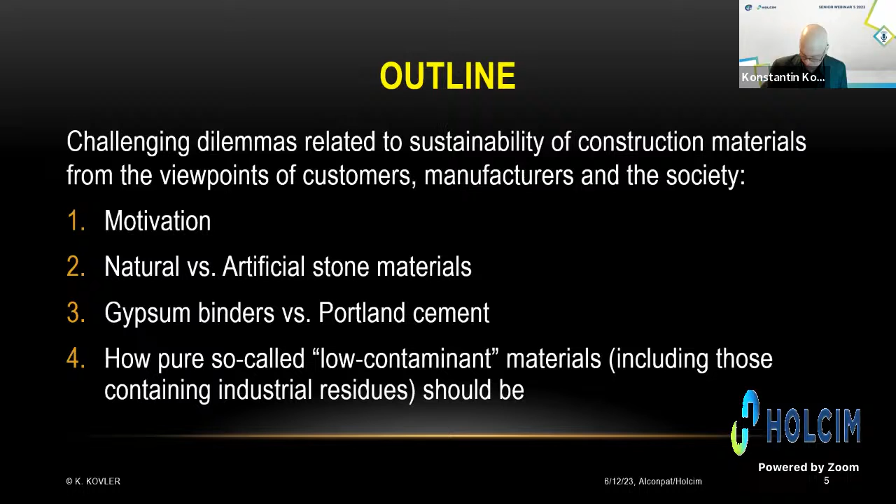So, motivation. As we know, construction not only consumes about 40% of materials produced in the world and about 1/3 of the energy, but also pollutes the environment. Extraction of construction materials, including sand, gravel, clay, limestone, and natural stone, causes noise, vibrations, and air pollution. So how can we manage all these unpleasant influences on the environment? And of course, we cannot forget about the transformation of land into built-up area.

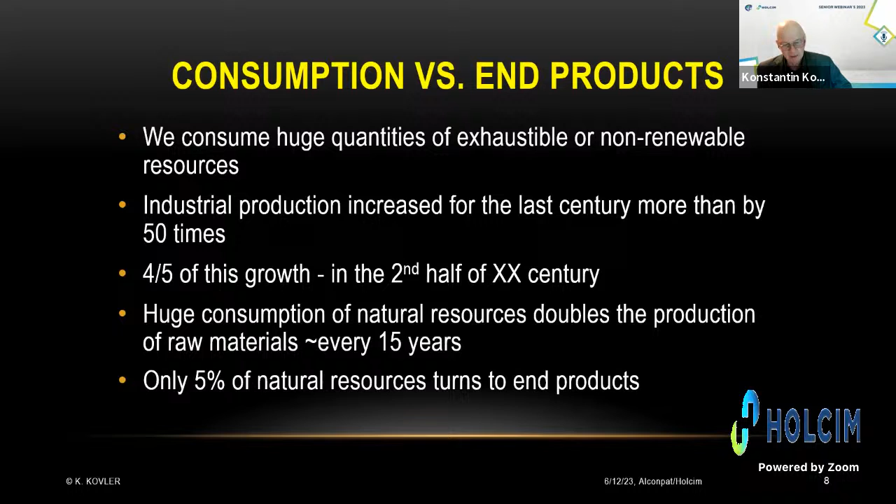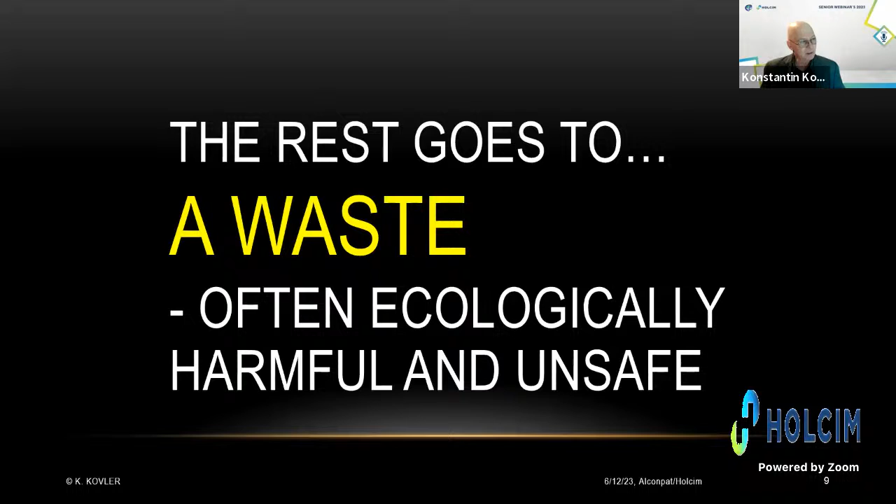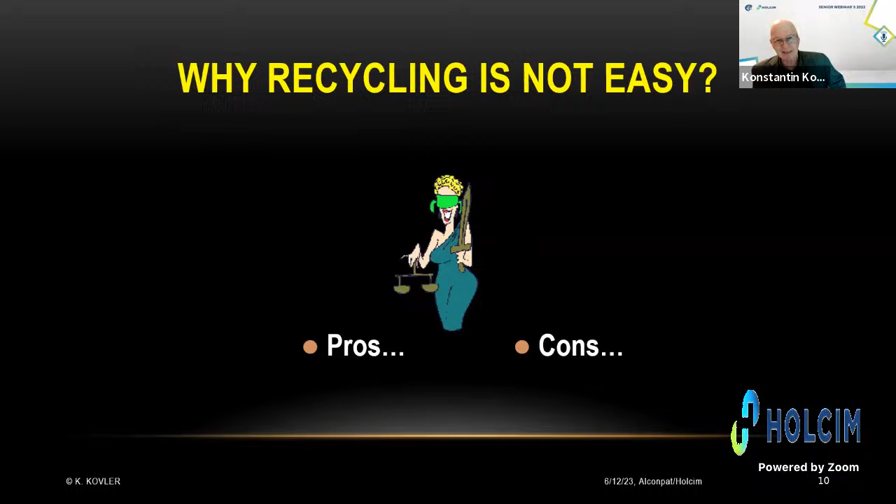So, unfortunately, we consume huge quantities of exhaustible resources, and industrial production has increased dramatically over the last century, by more than 50 times, and 80% of this growth happened in the second half of the 20th century. Huge consumption of natural resources doubles the production of raw materials every 15 years. And very unfortunately, only 5% of natural resources turns into end products. The rest simply goes to waste, often ecologically harmful and unsafe. So this is a very challenging topic, not only for our generation, but for our kids and grandkids, for the next generations. And then I would like to discuss shortly why recycling is not so easy. Let's consider the pros and cons of recycling.

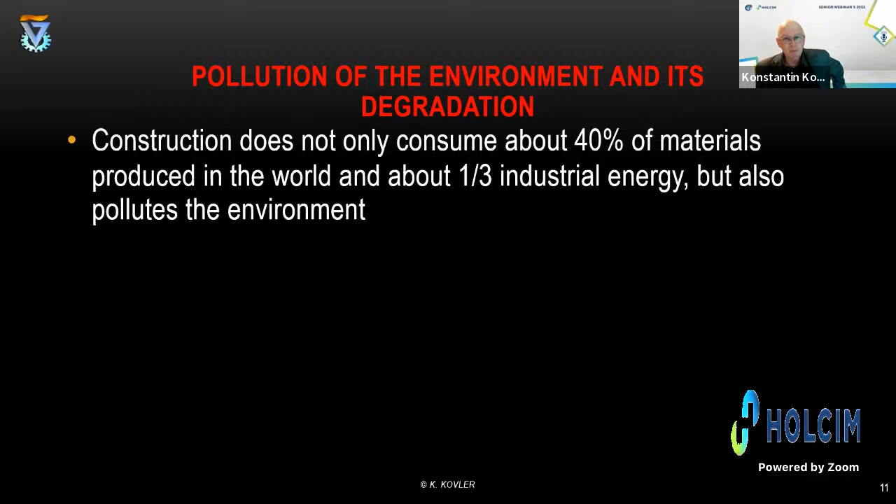Again, I spoke about pollution, transformation of the land. What would be the solution? Like Professor Mehta mentioned more than 10 years ago, let's consume less concrete, because concrete is still the most popular building material. It's consumed in large quantities. After water, this is the second consumable in the world.

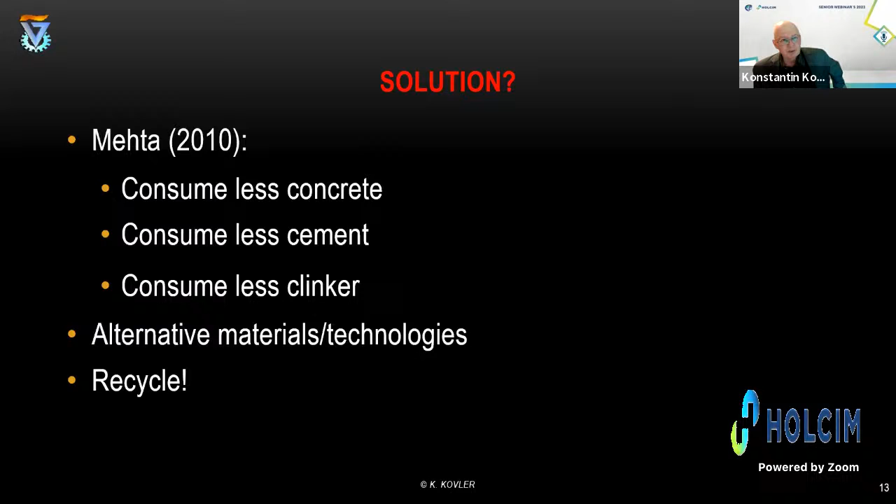Let's consume less cement, and let's consume less clinker, and let's discuss and develop alternative materials and technologies. And of course, let's recycle. This is what Professor Mehta said. But the question is why it's not so easy. And the first dilemma I would like to start to discuss: natural versus artificial stone.

Natural stone is used in the construction industry mainly as fractionated materials, as aggregates for concrete, both dense and porous aggregates, as mineral fillers. It's used for geopolymers, but again, it's fractionated material. It's powder or granular material. It's used as mineral pigments. It's used for thermal insulation, abrasive materials.

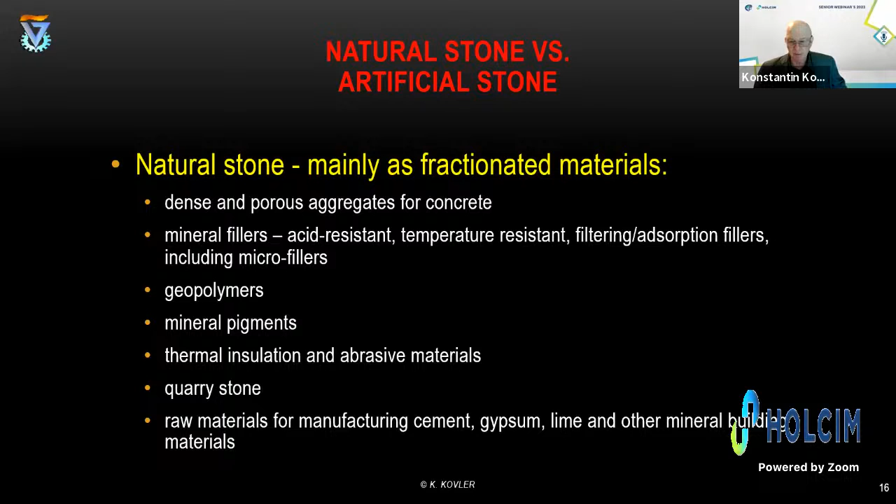So we are speaking mainly about quarry stone. And we are speaking about raw materials for manufacturing different kinds of building materials like cement, gypsum, lime, and other mineral building materials. Let's speak about natural artificial materials. This is another group, which is a kind of intermediate or overlapped materials,

organosilicates, basalt fibers, foamed and liquid glass, basaltoplastics, expanded products like perlite, different kinds of adsorbents, mineral binders, and of course concrete, ordinary concrete, aerated concrete products, gas silicate and pressed powder products, etc., ceramics and fireproof products, and so on.

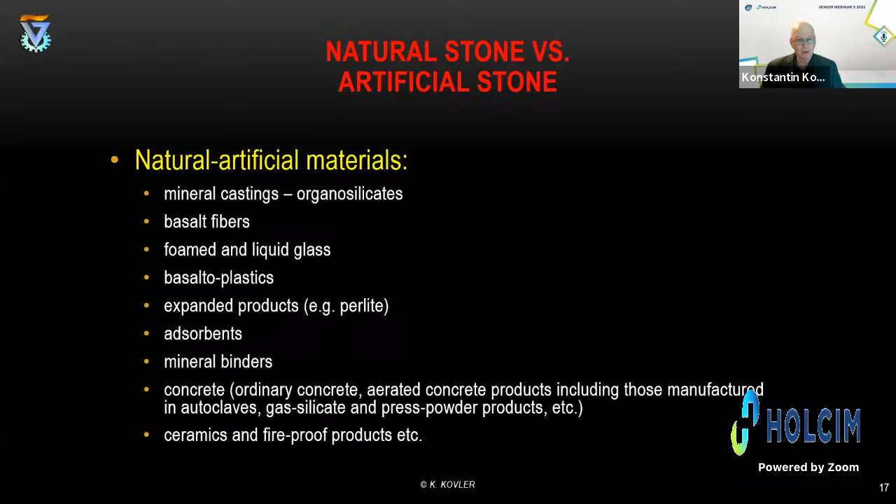And finally, I come to natural stone products, which are sometimes called dimension stone. You can see many different examples of dimension stone products. They're used for finished products. Let's say artificial stone tiles, paving stones, prefabricated panels, architectural details,

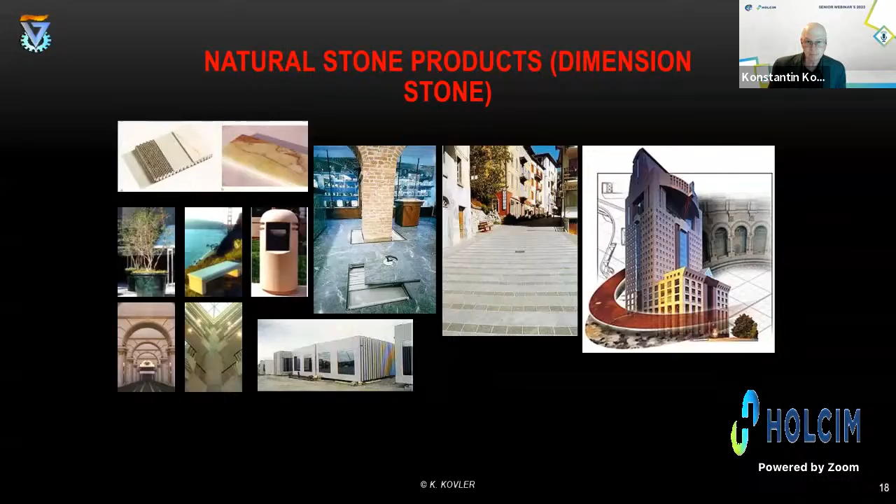interesting things to produce like benches and other interesting and important architectural details, vazons, interior details, sandwich panels, and many, many other things. So, natural stone, like artificial stone, starts with rock extraction. And then I would like to discuss coercive or destructive versus non-coercive or non-destructive methods of extraction.

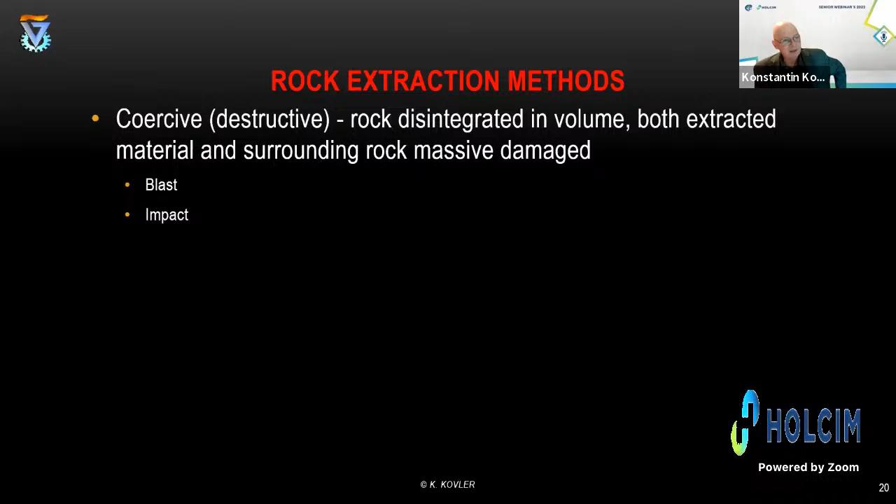Rock extraction methods. So first of all, destructive, which are the dominating methods of rock extraction, where rock is disintegrated in volume. And unfortunately, both the extracted material and the surrounding rock massive are damaged. Sometimes people say it's a barbaric technology. It's blasting and impact. So it's really coercive, destructive technologies which influence the environment a lot.

Then we have so-called partly coercive or partly destructive, where rock is disintegrated in a certain volume, but the surrounding rock massive is undamaged. As an example, we can mention TBM, or tunnel boring machines, where the extracted material is fractionated material, aggregates, but the massive surrounding the tunnel is left undamaged. And non-coercive or non-destructive, where both the extracted rock and surrounding rock massive are undamaged.

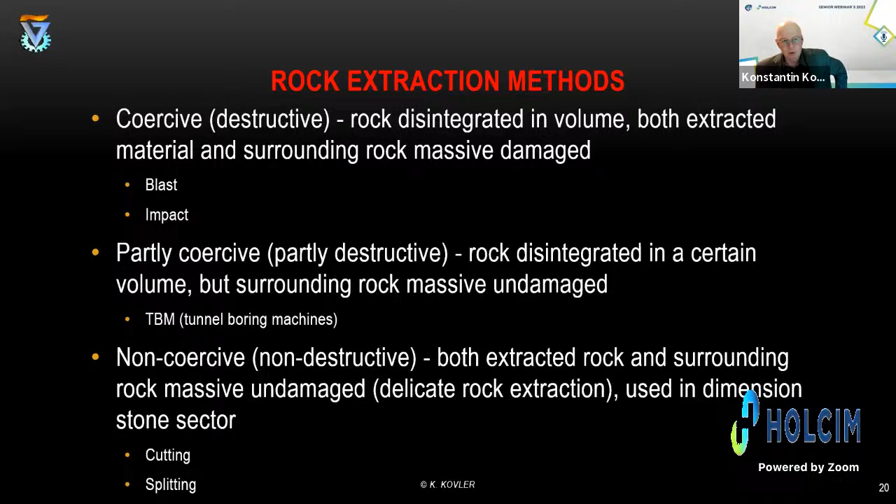So we can call it delicate rock extraction, which is used in the dimension stone sector. Most of the technologies for dimension stone production are based on cutting and splitting stone. Let's start discussing drill and blast. I know that in Mexico and many other countries, also in Israel, the United States, China, India, drill and blast is the dominating technology for extraction of rock. So I don't want to go into detail.

First of all, we need to drill, insert the explosive, and then blast. We need to strengthen the roof, which is extremely important because the surrounding massive is damaged. And we need to invest money, and it's a time-consuming technology to strengthen the envelope by shotcreting or by inserting precast elements made of reinforced concrete. So it's not easy, but we have to do it. Depends on the rock, of course.

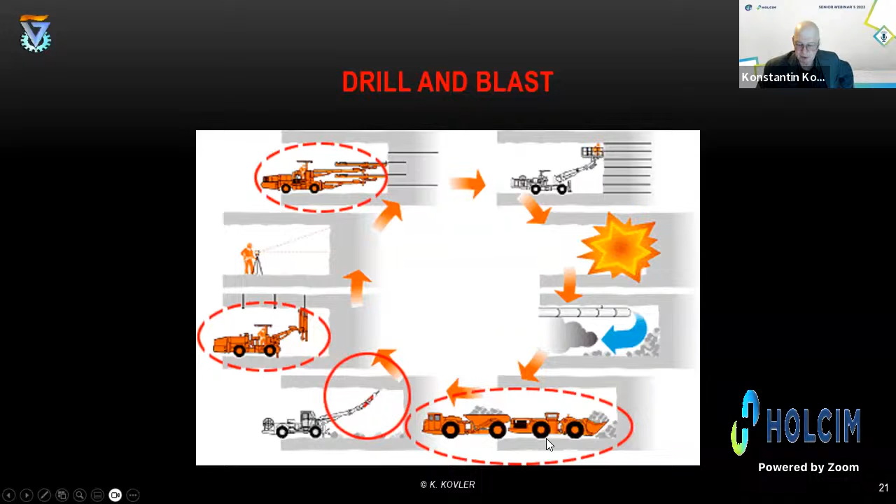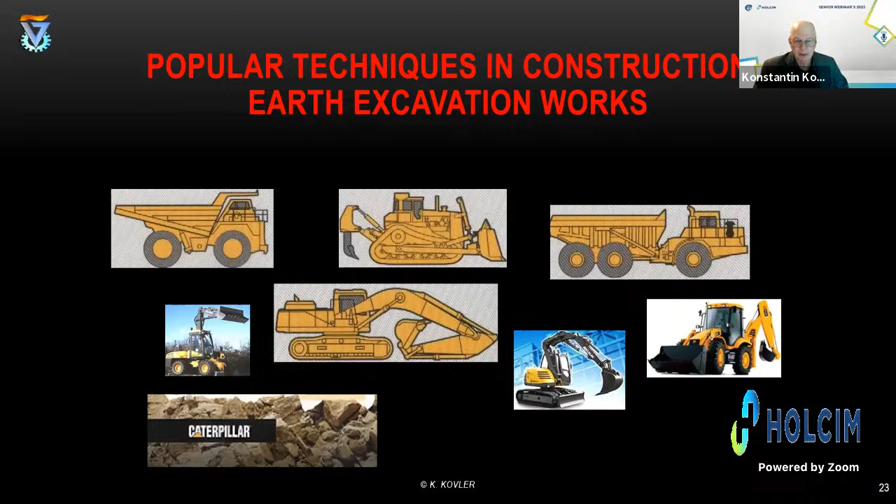And then we need to extract the dust formed during the drill and blast treatment, and extract all the fractionated material from the quarry outside. Okay, then shortly mentioning popular techniques in construction earth excavation works. We are speaking about power and energy consuming machines, bulldozers, tractors. Caterpillar is a very famous company producing these machines. They consume a lot of energy, fuel. This is something we need to take into account when we speak about sustainability.

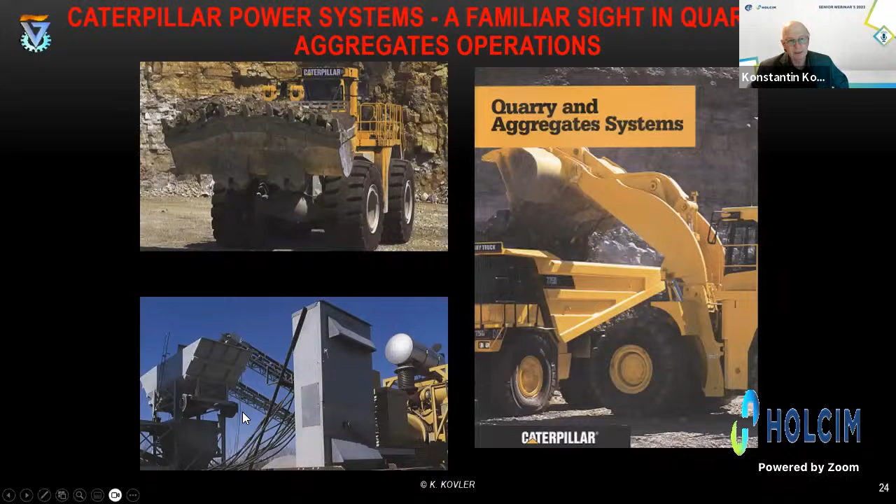Caterpillar, many of you, I believe, are familiar with quarry and aggregate systems. You can see very powerful trucks and excavators and equipment for aggregates operations in quarries. And then a few words about TBM, which is, like I mentioned, partially coercive. This is a typical example of TBM. It's like a train. It's a real train.

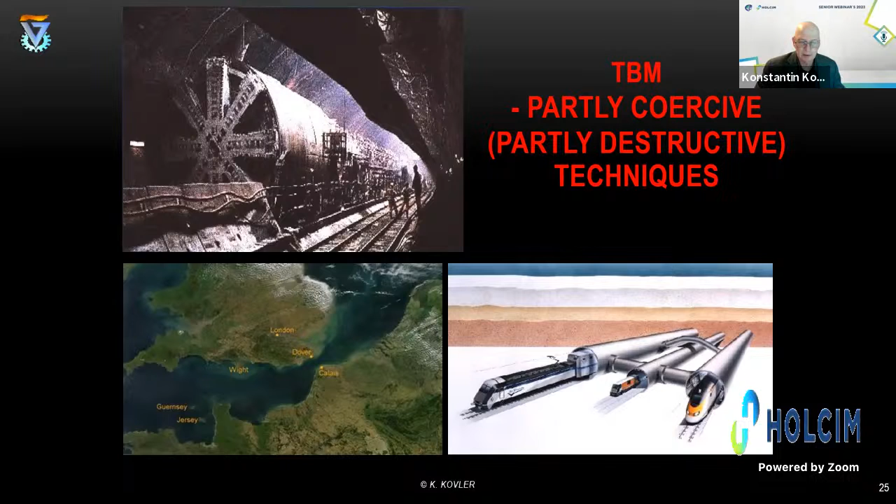The Gotthard Tunnel connecting Italy and Switzerland is more than 40 kilometers in length. When it was produced, it took time, and during this project, 4 different huge TBMs worked at the same time in the Gotthard tunnels. Another very famous example is the La Manche Tunnel connecting Great Britain and France, also an underground tunnel made by these techniques. Then let's speak about non-coercive or non-destructive methods.

Let's remind the time of appearing concrete. When do you think the massive concrete construction started in the world? Perhaps it started after the Second World War in Europe and many other countries, but mainly Europe, because half of Europe was completely destroyed during the Second World War. I'm not speaking about Bauhaus and some other interesting examples. I'm not speaking about Roman concrete, which is a very nice example, but I'm speaking about massive concrete construction.

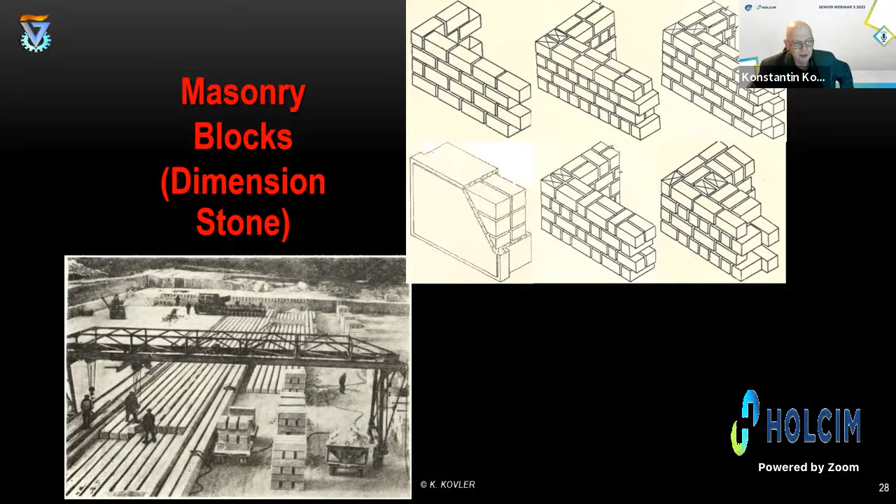Less speaking about new construction and more speaking about new technologies, green technologies, recycling, sustainable technologies, not power consuming technologies, and not material consuming technologies. And this is a perfect example. Saws, different kinds of saws and discs. They're very popular. You can see some examples of saws and discs.

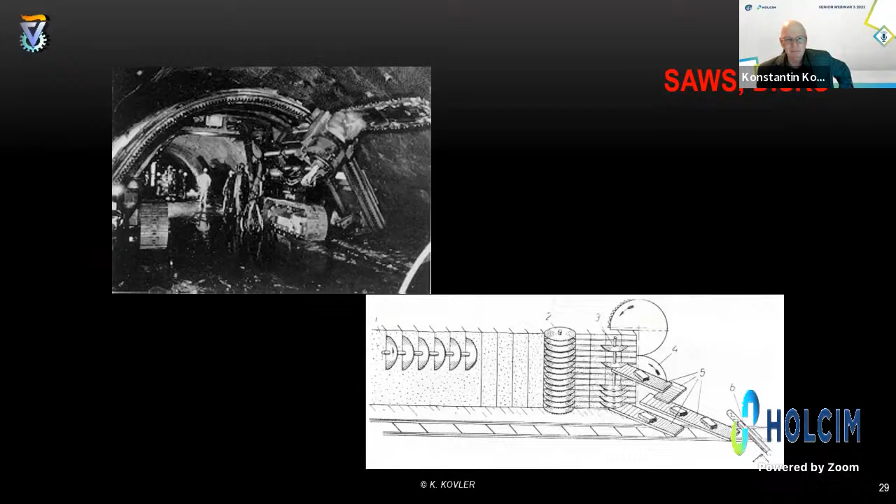By the way, when I visited northern Italy, I found many interesting examples of so-called all-round technologies, because when you extract big blocks, big masses of stone, very good stone for cutting and splitting, then you have, of course, some kind of waste. But this waste is not bad to utilize as sand, as aggregate for concrete. And also, if this is a good limestone, why not use it for production of cement? So this area is rich in different examples of enterprises producing different kinds of products.

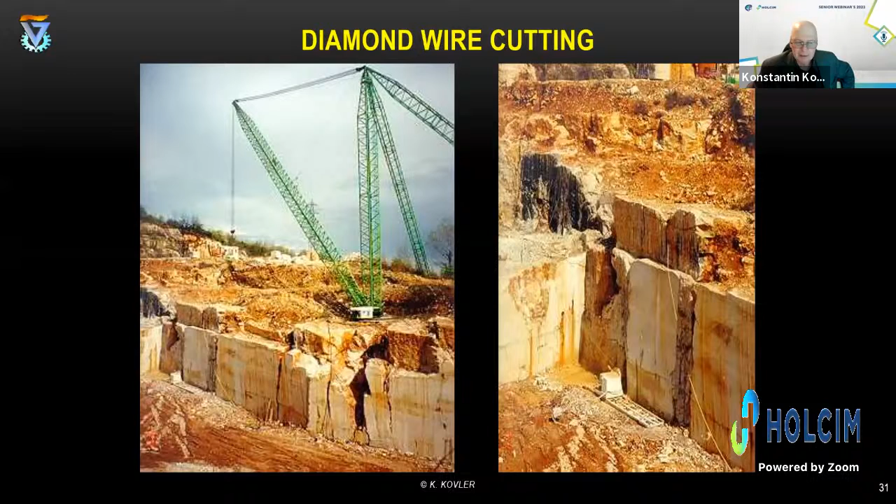So this is very interesting and very promising technology, which was developed in Italy more than 50 years ago. And this is a plant, look at this plant, producing big blocks, and then they are cut into different slabs, and these slabs can be further cut into tiles. Or this is a splitting technology.

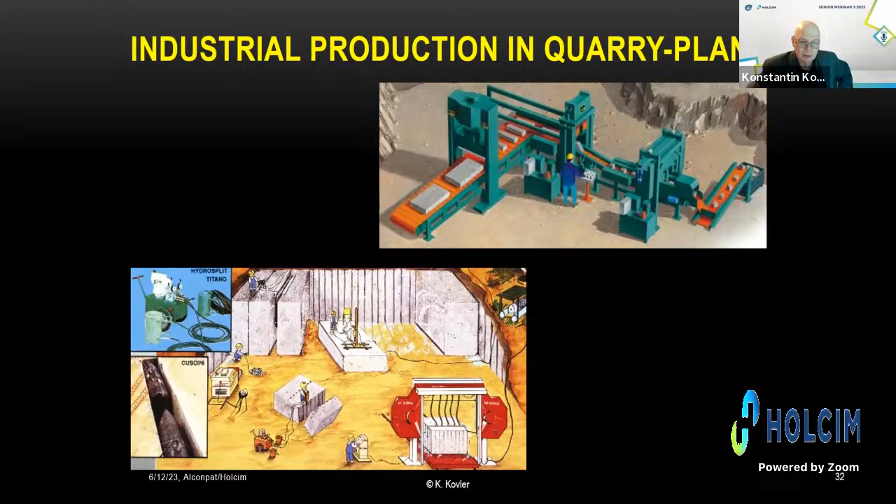So this plant is located in the quarry just to minimize the transportation expenses, and the closeness to the raw material is extremely important from economical calculations, and also energy and fuel consumption. Unfortunately, in many countries, and I'm criticizing what we have in Israel, in our small country, we have huge annual production of concrete. We are producing crushed stone for aggregates, both coarse and fine, maybe 3 times more than Americans and Europeans produce.

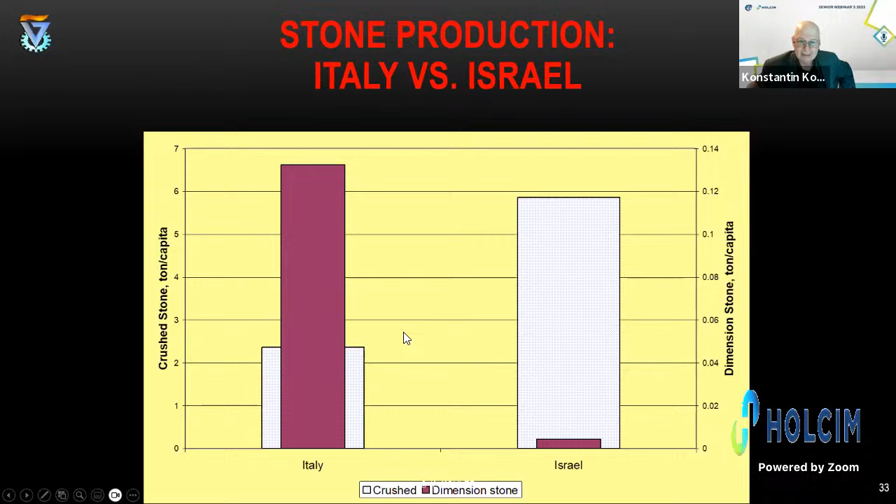But you can see how small, how limited is the part of dimension stone, because these technologies are almost not known in Israel, and this is a pity. In comparison to our situation, Italy is very famous for producing dimension stone. Of course, they produce a lot of aggregates, crushed stone, but much less than we produce in Israel. So this is what we have in Israel. I'm criticizing again our local technology.

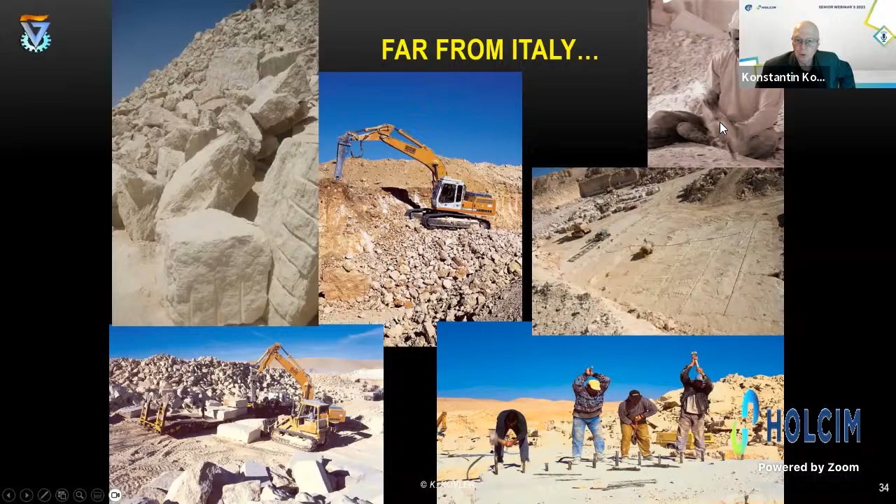So most of the technologies for producing dimension stone, as you can see, are labor consuming. They're based on drilling and then splitting big blocks. And then you can see what we have. This is handwork, a lot of manual work, which is not what we can be proud of. And this is my colleague in one of the quarries in northern Israel. You can see a lot of signs of drilling, drill by drill by drill. A lot of energy is spent only for drilling. And then they're splitting these big blocks.

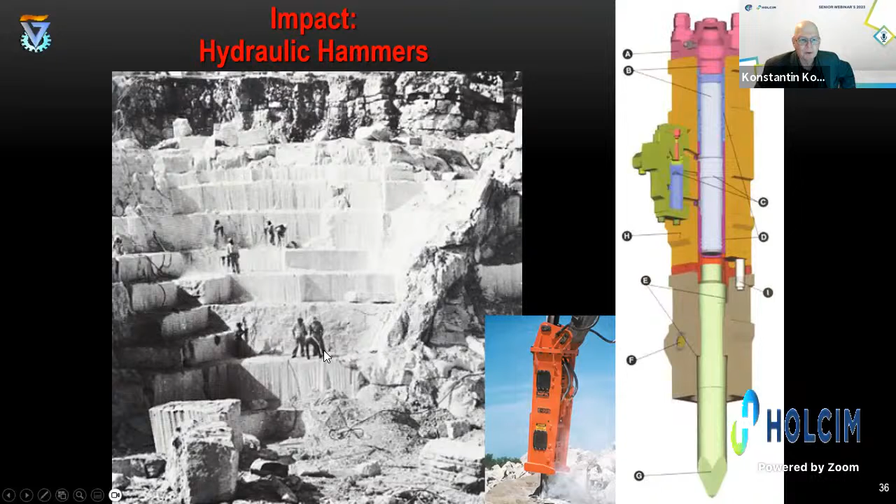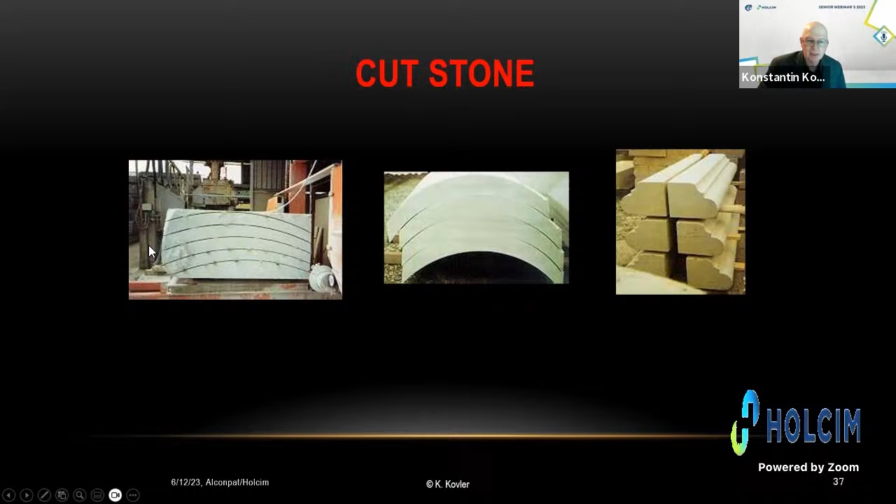This is outdated technology. We need to fight this outdated technology and introduce as much as possible the high-tech technology based on splitting and sawing. You can see hydraulic hammers. They are very popular for rock production in Israel and also in other countries. And look at the finished product. It's a cut stone. You can cut everything now. It's a real high-tech technology. You can produce very sophisticated geometry, very sophisticated shapes of the elements. You can see this shape and this shape and this shape. So the sky's the limit.

It protects the aquifer, the groundwater, from pollution, because if you explode underground, then you provoke cracking, and through these cracks comes the polluted water. Maybe you heard about the pollution coming from the industrial zones, because many industrial plants are polluting. We have a lot of pollution in the form of SO2 gases and other acidic pollution. This pollution penetrates into the aquifer. And then the salinity and quality of groundwater get worse and worse every year. So this is a problem for the next generations.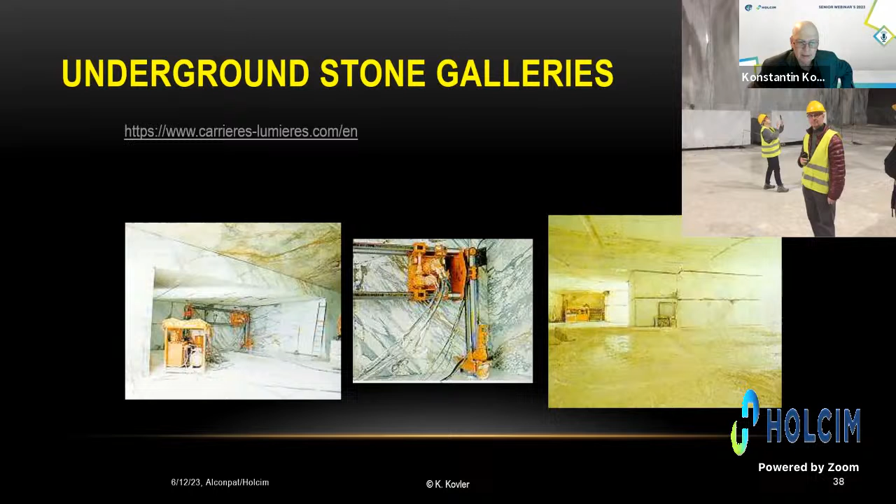Let's speak about canceling or forbidding in the next years all these barbaric technologies of producing aggregates by explosive techniques, which are considered the cheapest techniques in rock construction underground. Open quarries are also a problem, because you have so-called wounds. If you don't want to see these wounds on the surface of the earth, and you don't want to see craters like on the moon in a few years, in countries like Israel, which is a small country without enough land, then there is a problem also for open quarries. I need to repeat about the noise and vibrations, especially near populated areas, near the cities.

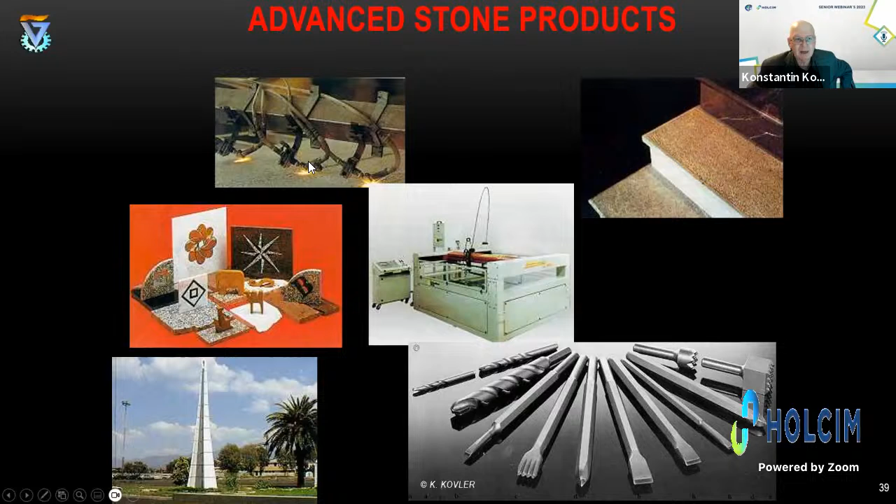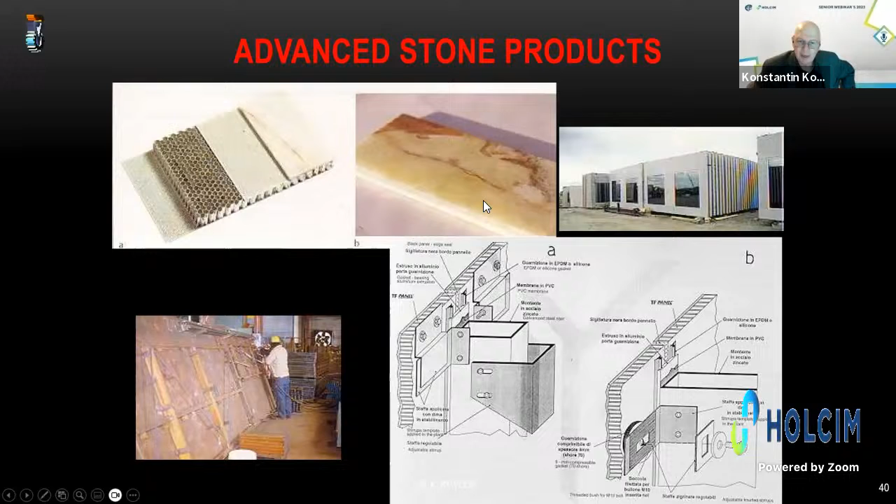And then look at the techniques for producing dimension stone. So this is a plasma. As you could see, these are different instruments, popular. You can see some more details, advanced stone products, sandwich panels. You can see the layer of natural stone as the external layer, which is very nice. Architects are very excited to see this interior and exterior. But by the way, there is no problem in modern technology to produce a few millimeters, 1 millimeter, even less than 1 millimeter thickness of this coating very accurately, very delicately, and then to coat your products.

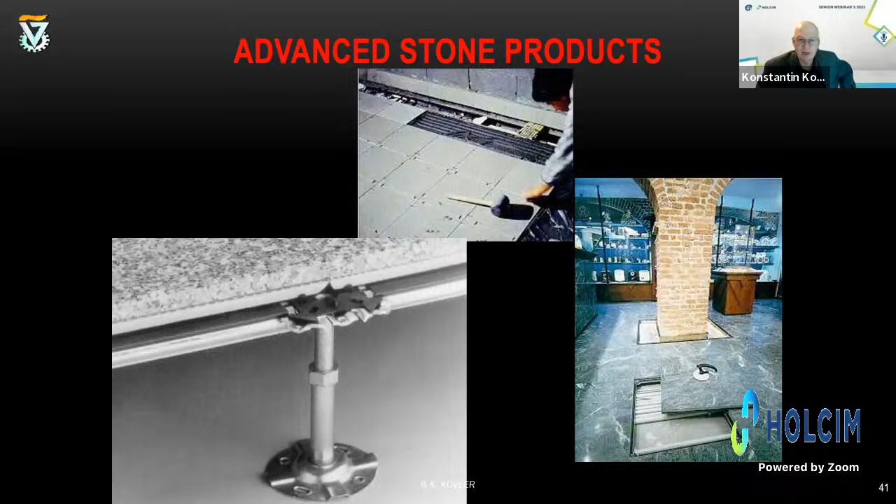This is a very advanced floor material. You see, all these communications should be hidden from us. And then you just put these large panels, large tiles, and you can make a repair if you need by opening this hole and then repairing the communications, the electricity, the water pipeline, underfloor heating if you need. So this is very important and very nice to know.

This technology is very important for producing advanced stone products like architectural elements, decorative floors, and so on. So again, to repeat very briefly, environmental damage from coercive methods: noise, vibrations, artificial earthquakes, by the way, dust, air and water pollution, visual impact, impact to biodiversity due to the land conversion, surface water regimes altered by blasting, cracking in sedimentary rock above the aquifer. I just mentioned it a few minutes ago.

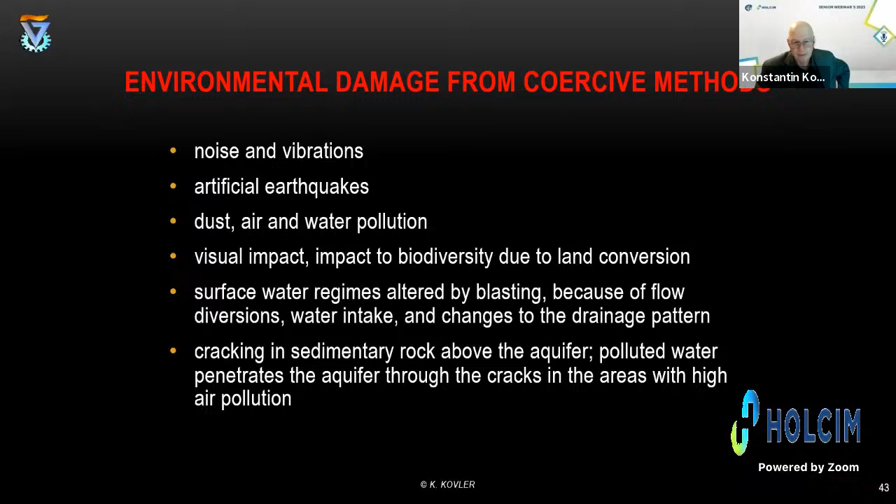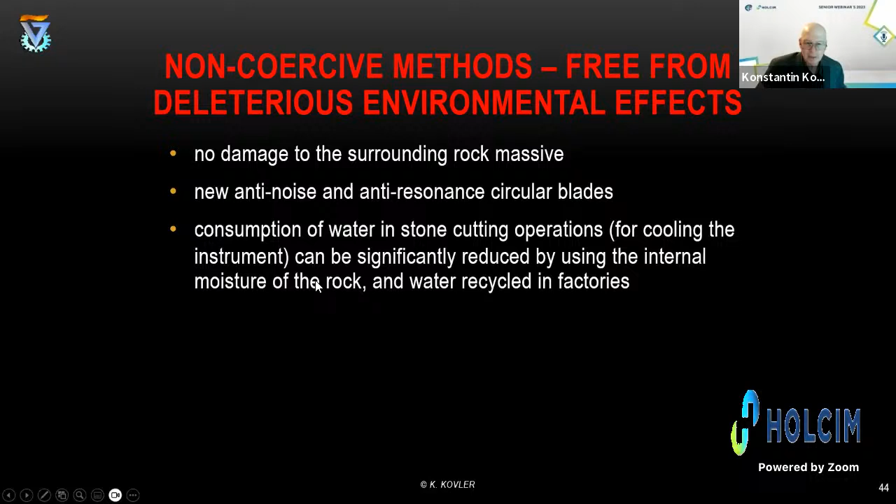What about non-coercive methods? They're free from deleterious environmental effects, no damage to the surrounding rock. New anti-noise and anti-resonance circular blades are introduced now in the industry. Consumption, by the way, of water. Of course, if you saw with the wire, diamond wire, or another instrument, we need to cool this instrument by water. But look, the natural moisture in the rock massif is not zero. The consumption of water in stone cutting operations for cooling can be significantly reduced, maybe even excluded, by using the internal moisture of the rock and water recycled in factories.

What do we have now? Unfortunately, the goals can sometimes be contradicting. On one hand, we need to speak about construction of engineering structures. Let's take an example such as a tunnel. For making a tunnel, we need to make it as quick as possible. And of course, blasting, the drill and blast method, is very cheap and very fast. But again, don't forget about strengthening the envelope, because it consumes time, and strengthening elements like a reinforced concrete envelope.

And then the construction materials industry. The construction materials industry has other, let's say, priorities. Sometimes real construction projects are contradicting the construction materials priorities. For example, in Haifa, approximately 20 years ago, we had a new tunnel. It's called the Carmel Tunnel, which is 5 kilometers in length, and was done by drill and blast. But I suggested to the design company to consider using this extracted material, because during this extraction a lot of fractionated material is produced, to produce aggregates for concrete, for example.

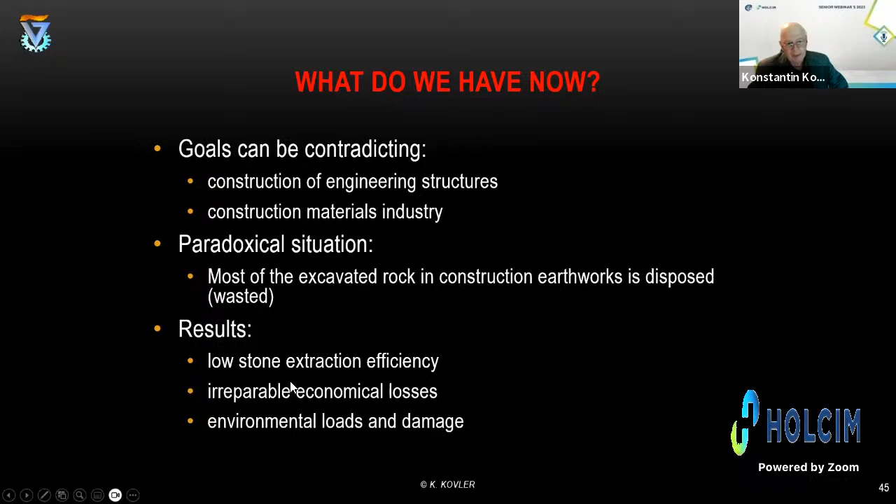And this is a paradox. Most of the excavated rock in construction earthworks is disposed, simply wasted. And the results are here: low stone extraction efficiency, irreparable economic losses, and environmental loads and damage.

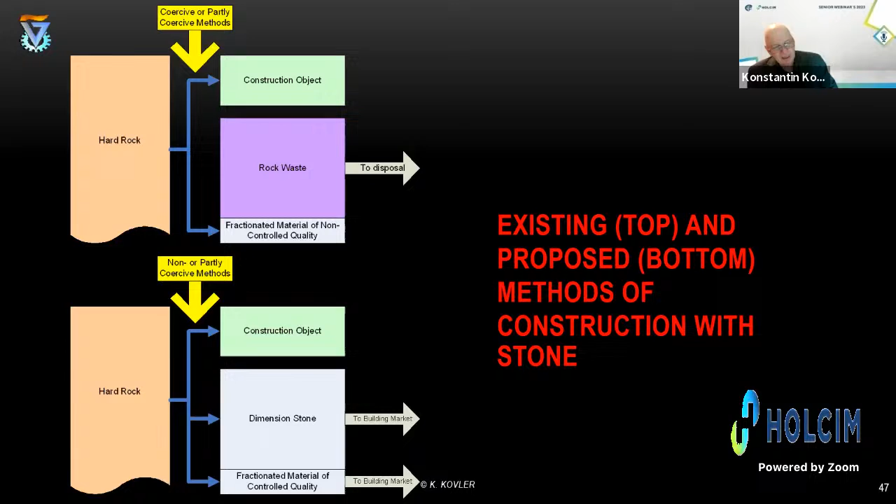But what about dimension stone? If you open the menu and price list of dimension stone products, for example, slabs and tiles, they are sold by square meters, and cubic meters if we speak about big blocks, but mainly for construction, square meters. How much can 1 square meter of slab or tile cost? Let's say $50, or $100 for a much nicer product, marble and dolomite, for example. And then the question, how many square meters we can produce from 1 cubic meter? And then it's very easy to calculate.

For example, we can come to the conclusion that 1 cubic meter of very good dimension stone can cost hundreds of dollars and even thousands of dollars. And if you compare with the price of oil, it's much more than the price of 1 barrel; 1 cubic meter includes 6 barrels of oil. How much is 1 barrel now? About $60 to $80, or 100. Multiply by 6, you can find the price of oil by tons. And then it's very easy to translate tons and cubic meters.

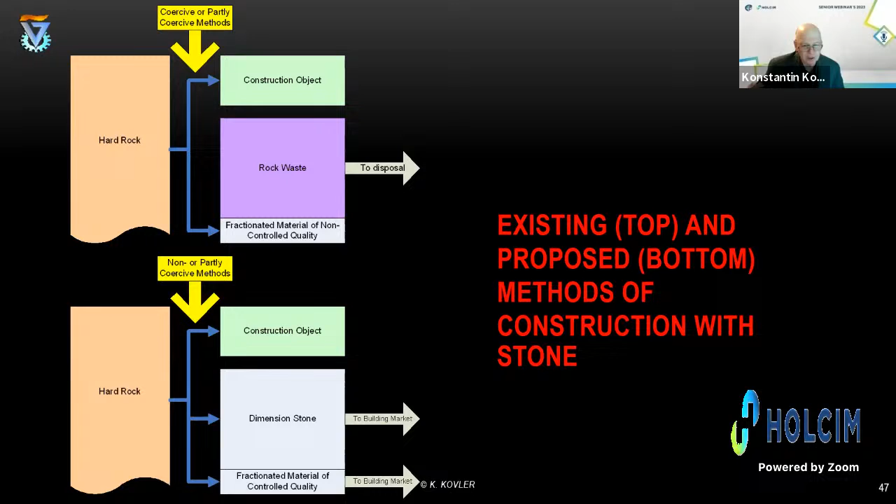So we just do not understand, do not imagine, that we drop very expensive material, which is mainly extracted for producing aggregates. So it's a great pity. Now, let me switch to another dilemma.

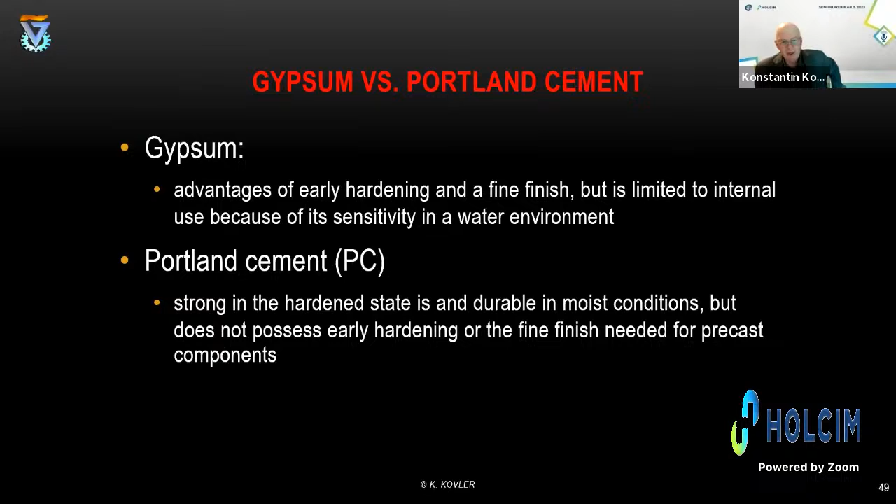I was very active several years ago and published some papers about gypsum versus Portland cement. Gypsum, as we know, has many advantages of early hardening and fine finish, but is limited to internal use because of its sensitivity to water. Portland cement, in contrast, is strong in the hardened state and durable in moist conditions, but does not possess the early hardening or the fine finish needed for precast components.

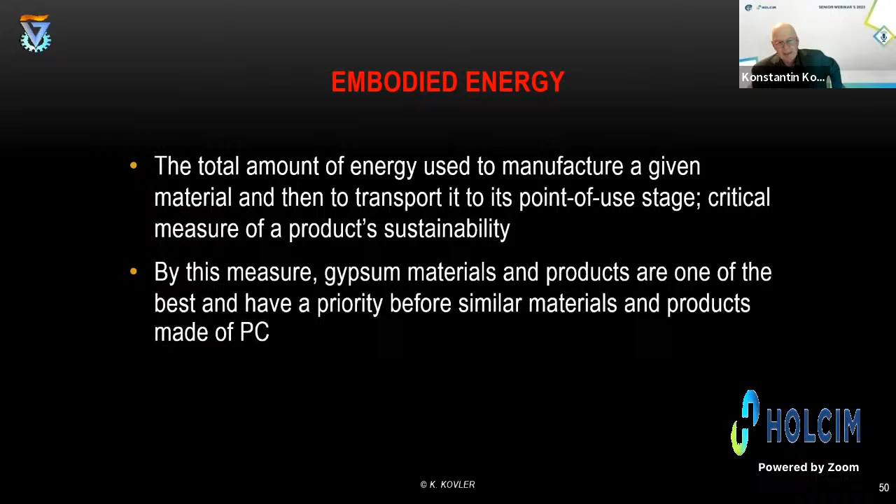About embodied energy. The total amount of energy used to manufacture a given material and then to transport it to the point of use stage is very important. This is a critical measure of sustainability. By this measure, gypsum and gypsum products are one of the best and have priority before similar materials and products made of PC. Maybe you know that for production of gypsum binders and gypsum products, we don't consume as much energy as we consume during the production of cement.

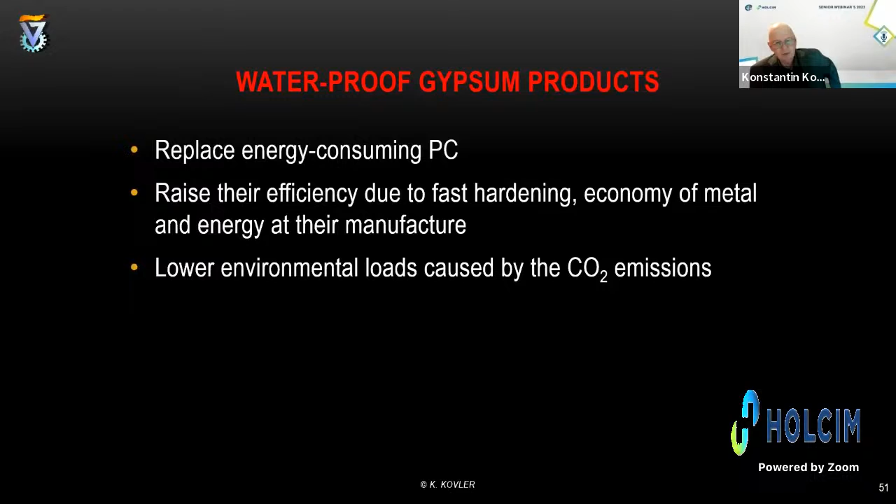Waterproof gypsum products. I published several papers about waterproof gypsum, but it's not easy. So in principle, we know how to make gypsum products waterproof. It's not easy, but we can do it. Then we can lower environmental loads caused by CO2 emissions by introducing more gypsum, but special gypsum. We can decrease transportation expenses and accelerate construction speed.

The idea is not mine. The idea to overcome the disadvantages of gypsum, because gypsum is not durable in a moist environment, by adding Portland cement, again, was not mine, but adding some active mineral additives, like pozzolanic materials, belongs to Russian authors. When most of the European part of Russia was completely destroyed during the Second World War, they started to introduce gypsum products also for construction of external structures. And then some papers were published.

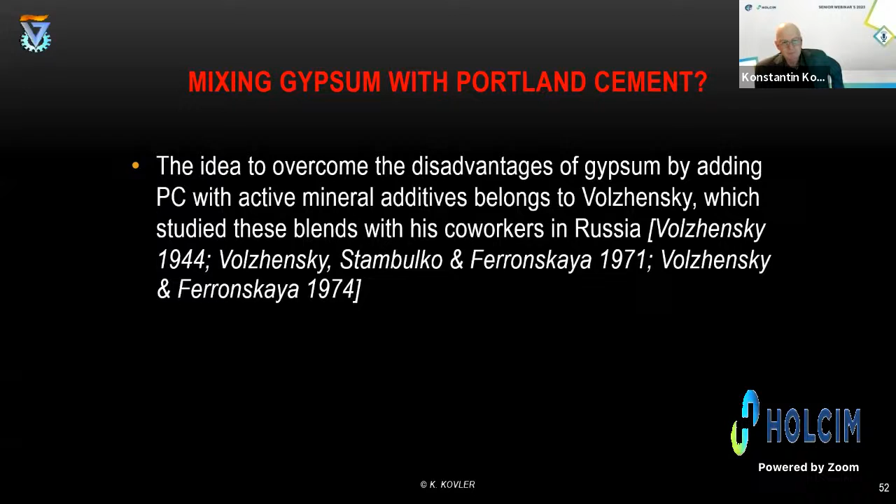I'm utilizing my knowledge of Russian. I met personally with Professor Ferronskaya. Unfortunately, she died a few years ago. Professor Volzhensky and Ferronskaya published very good books. So I tried to introduce these ideas, and we published papers together with Professor Bentur, one of my seniors in the Technion, and some other colleagues.

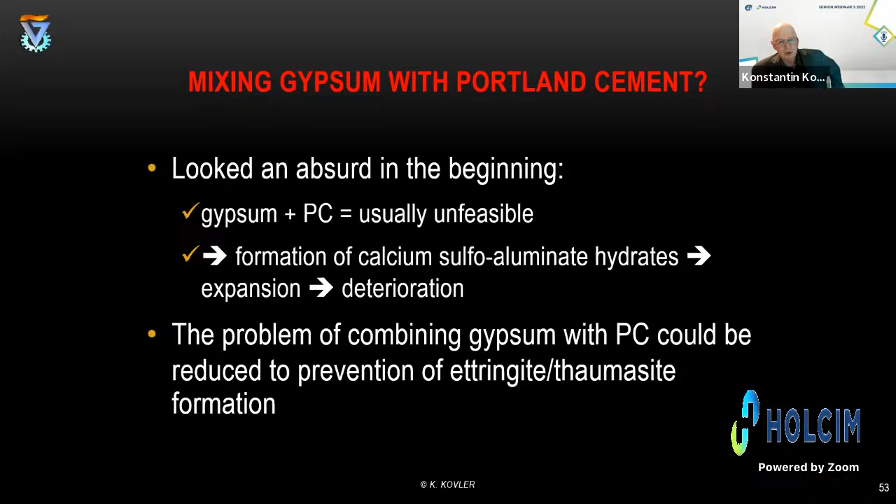And we tried to add some active mineral additives like silica fume to make peace between these antagonistic materials, gypsum and Portland cement, to avoid the formation of calcium sulfoaluminate hydrates, which result in expansion and deterioration. Then you can see we just mix gypsum and cement. This is 75% gypsum and 25% Portland cement. In 200 days of water immersion, you can see huge expansion. The material completely loses its strength and cracks. And this is, of course, out of the way to implementation.

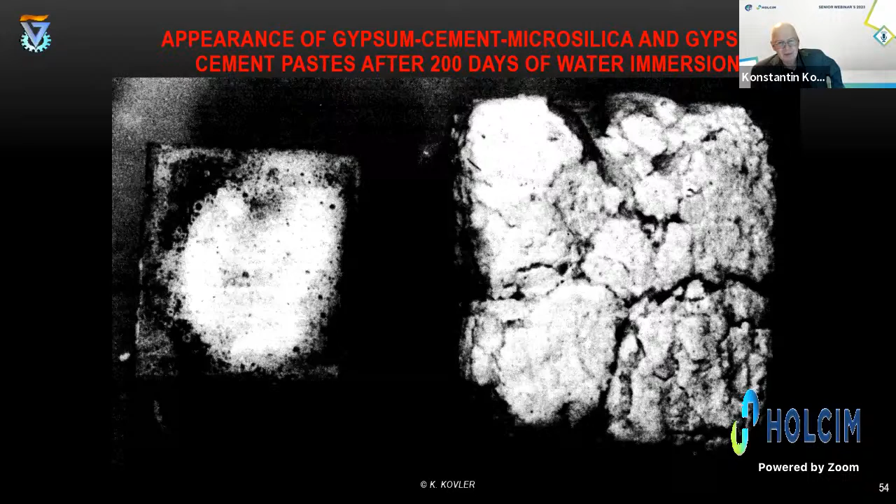And then this cube, which was immersed in water, was made of gypsum 75%, Portland cement 20%, and only 5% microsilica. And then please look, the cubes are very strong, they're completely intact, they're very good. So you can see the graphs. We published these graphs in some of the papers.

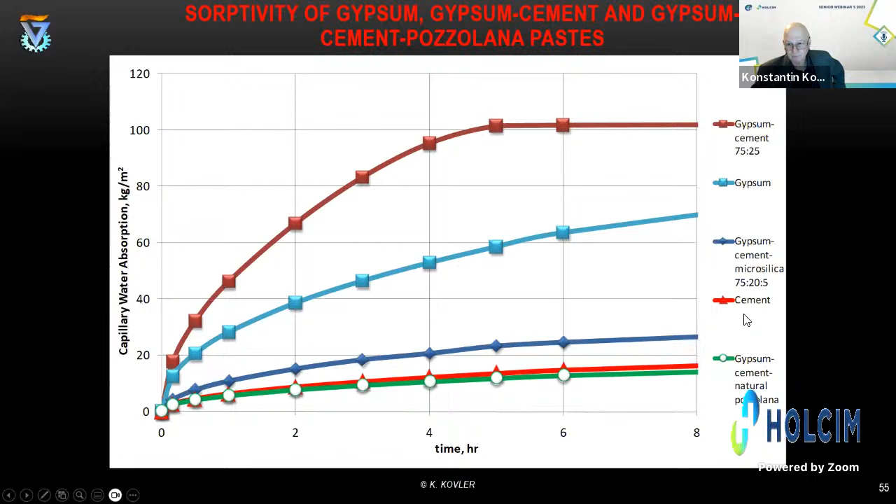This is capillary water absorption, huge in gypsum cement, 75 to 25% gypsum to cement. And this is the green curve, gypsum cement natural pozzolana. Gypsum cement microsilica is very close to what we have with gypsum cement natural pozzolana. So you can see this is competing with cement by capillary water absorption.

And finally, the third dilemma, about so-called low contaminant construction materials. I'm speaking mainly about recycling and construction with byproducts of industries. These products are often contaminated, not only by chemical contaminants, but also, and this is a very serious problem, by radioactive contaminants, like phosphogypsum, blast furnace slag, coal fly ash, and other types of ash. You understand perhaps why ash? Because when you fire the material, for example, coal is a mineral which is extracted from the earth.

Most of the material is lost because we produce energy, we produce vapor, we produce steam, from the part of this coal which is not mineral, which is organic matter. Organic matter is completely fired and lost. And what we have in the end is inorganic matter. This is our ash. With coal fly ash, 90% of the material, the organic matter in the coal, is lost, and only 10% is left as ash. In this 10%, we have so-called enrichment of all inorganic matter, like metals, heavy metals, and radioactive metals.

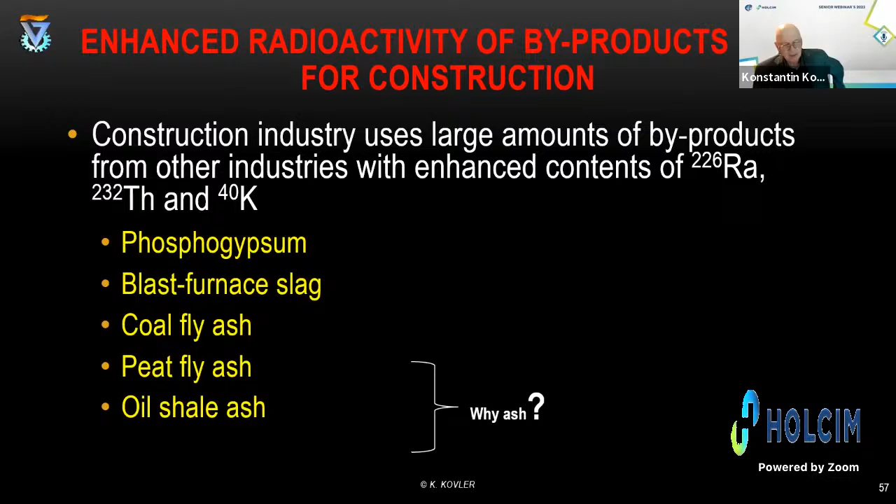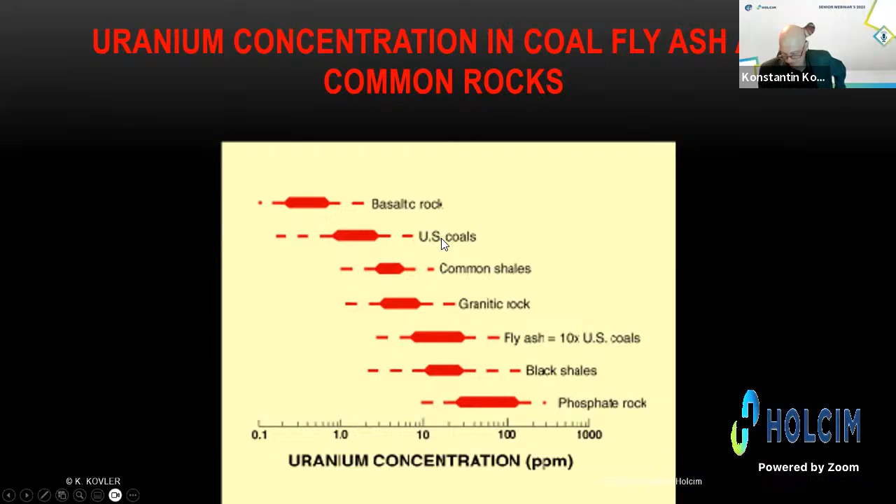Fly ash, for example, starts from coal. You see, coal is a normal material which has normal uranium concentration. Here it is in ppm. And in fly ash, this is data from US coals, it's approximately one order of magnitude richer than coal. And sometimes it exceeds the normative. Many years ago, unfortunately, the chimneys and other combustion installations of thermal power plants were not equipped with good filters.

Now the situation is much, much better. But a few years ago, the situation was simply awful. And this was a prediction of the pollution, by the way, into the atmosphere by these different radionuclides.

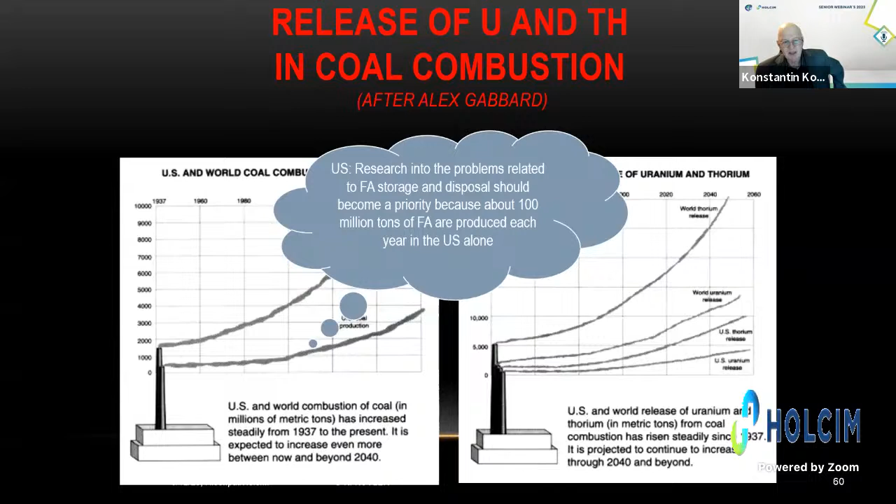Look at the typical concentration of radionuclides in most common building materials, which may include byproducts. Here is the list of the 3 types of byproducts: phosphogypsum, blast furnace slag, and coal fly ash. You can see so-called radium equivalent. You can compare the numbers. Concrete, just concrete, it's much less.

I can tell you that in a country like Israel, we are rich with sedimentary rocks, which are dolomite and limestone, it's much, much less. We are speaking about 50 or maximum 100 becquerel per kilogram. Becquerel per kilogram is an activity, a unit of radiation. And this is not typical for many countries like Israel. We have much less. And here we sometimes have much higher.

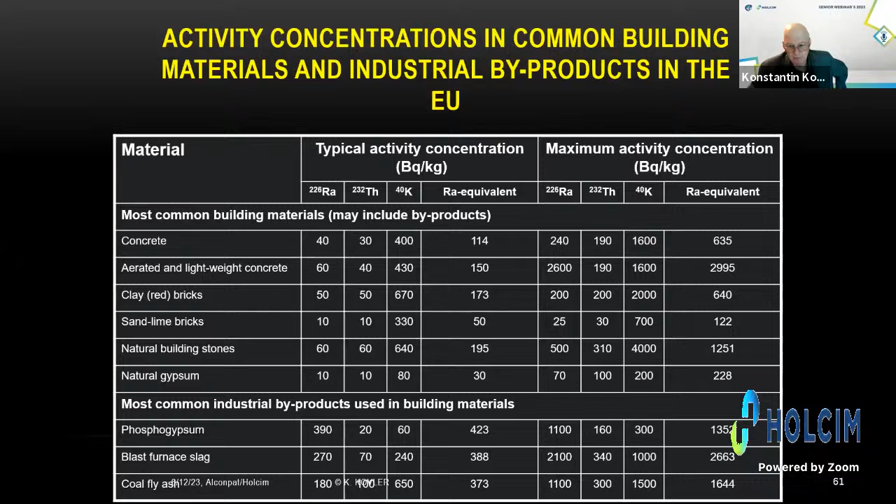For example, compared to our country, the phosphogypsum has much more in Morocco. And maybe you know that Moroccans produce phosphogypsum and phosphate rock much more than most other countries. 60% of phosphates are produced from Morocco. And they are much higher in radioactivity, both phosphate rock and phosphogypsum.

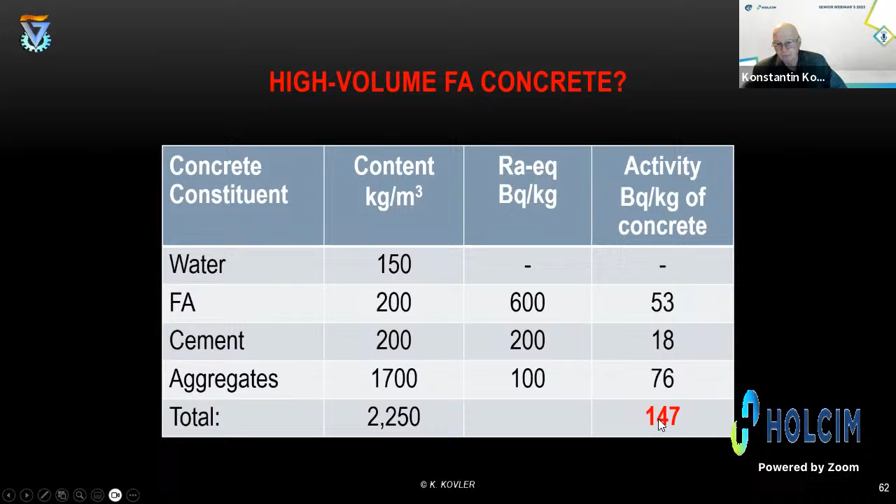And this is a so-called high volume fly ash concrete. It's a typical composition of high volume fly ash concrete. You can see the content. You can see radium equivalent. It's our data for fly ash, which is richer. Cement is a little bit richer than aggregates. But in total, we have a total activity of 1 cubic meter of 147, let's say almost 150.

And a few years ago, European guidelines spoke about 150 for the materials used in bulk amounts. If the thickness is limited, for example, superficial, or other materials with restricted use, like tiles, boards, etc., we have, according to this document, EU guidelines 112, a much more liberal normative. But again, we are speaking about the same 150.

Now the normative has been changed. The norms in Europe are more liberal than was discussed and suggested a few years ago in this document. But again, we can be very close to the limit. I don't want to speak about the pluses and benefits of fly ash, which is a very important consumable. This is a very important resource for our and next generations.

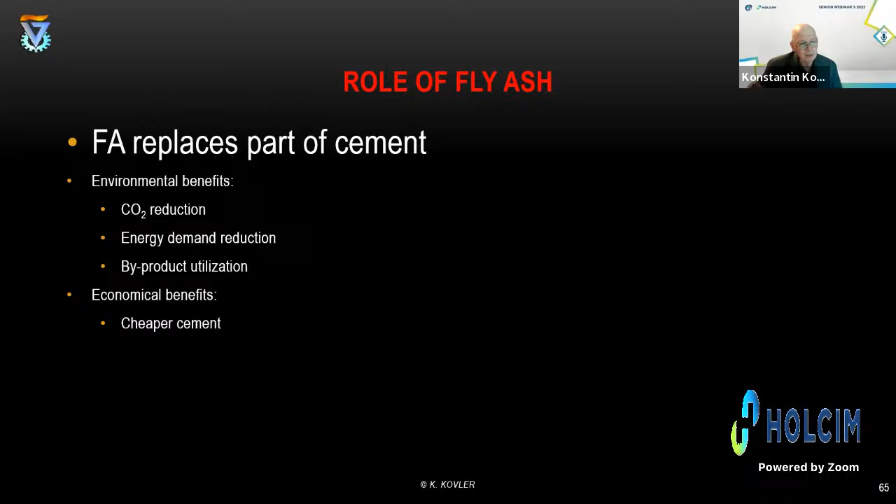CO2 reduction, energy demand reduction, byproduct utilization are very important environmental benefits. And economical benefits, it's cheaper than cement. In principle, this is a byproduct. So what we have in the cost analysis is only transportation, maybe, and some more accompanying costs, but the material itself is just a byproduct.

Radiological considerations. I personally published a few papers discussing radiological considerations of using coal fly ash in concrete. Yes, we know that gamma radiation, which is a direct result of the content of inorganic matter, including radioactive metals, is much higher. It can be 10 times higher than in many other mineral materials. But radon emanation power is low.

Maybe you heard about the uranium chain, and radon is one of the products of the disintegration of uranium-238, standing immediately after the precursor radium-226. And radon is a very important contaminant for indoor air. By the way, maybe you know that most of the radiation dose from natural sources comes from indoor radon. And very fortunately, radon emanation, the amount of radon exhaling and emanating from building products, is very low.

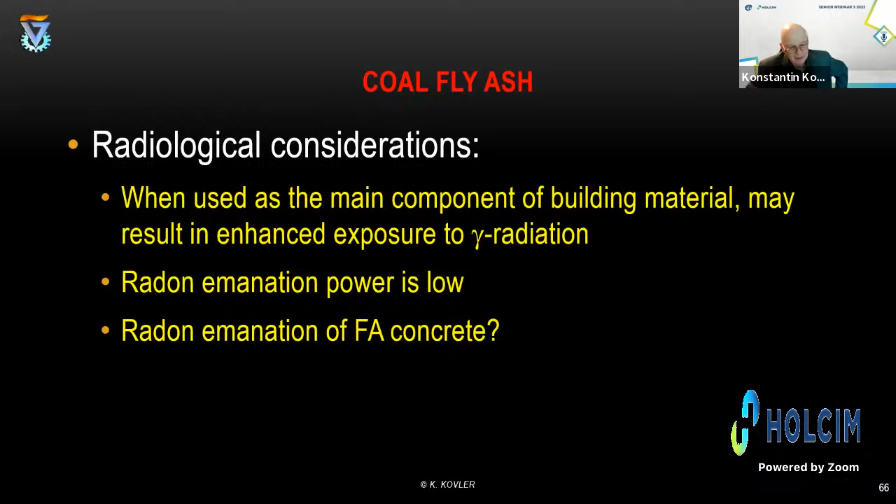Why? Because coal fly ash is just very dense particles made of glassy phase, produced under very high temperatures in thermal plants. And it is very difficult for radon to escape this glassy phase into the surroundings.

And this is the final part of my presentation. It's more philosophical. It's so-called ALARA. ALARA is a very important abbreviation in radiological protection. This is very important for regulators and the people working in standardization committees. I'm also a national delegate in the ISO standardization committee dealing with revision of the standards dealing with natural radiation. ALARA is as low as reasonably achievable.

ALARA is based on the linear graph between the mortality and the amount of energy absorbed by the body. And this is a real challenge, to answer the question, what is really reasonably achievable? And almost nobody knows how to answer this question. What is reasonably achievable? Yes, as low, we understand.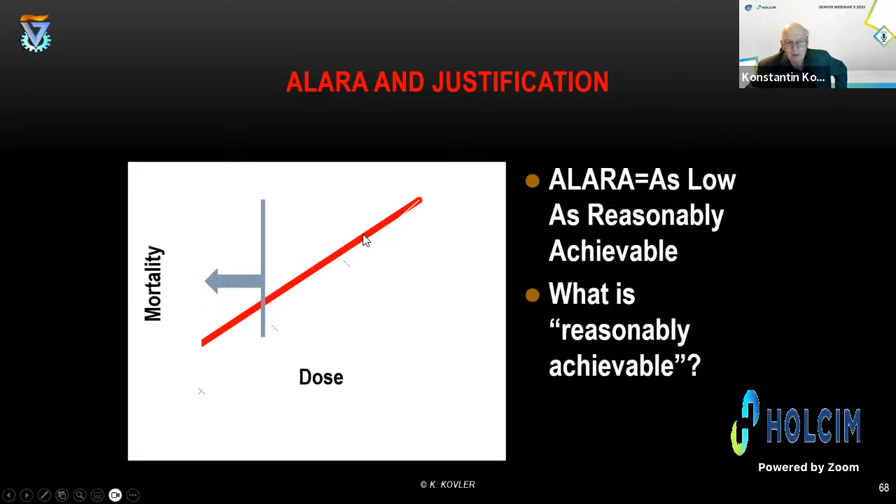We need to have zero, but every material extracted from the earth has some content of uranium, thorium, and potassium-40, natural radionuclides. These radionuclides appeared when the earth was created, more than 4.5 billion years ago. So they were the first elements in the earth. So we cannot avoid having some minor amounts of these elements in building materials. But what is really reasonably achievable?

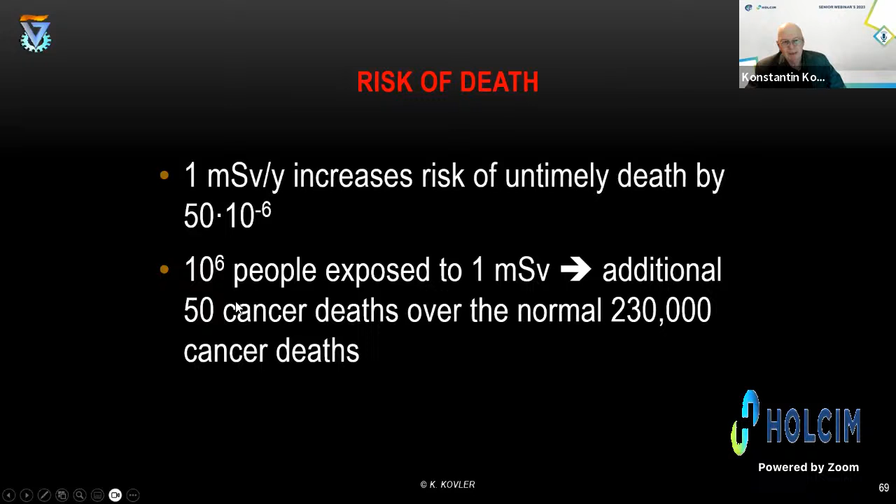Risk of death. In one of the papers we published, we tried to calculate it based on risk of death. Then we used these numbers. I don't want to overload you with the calculation, but this graph we used for the calculation is based on the dependence between risk of untimely death and annual income, k$ per person.

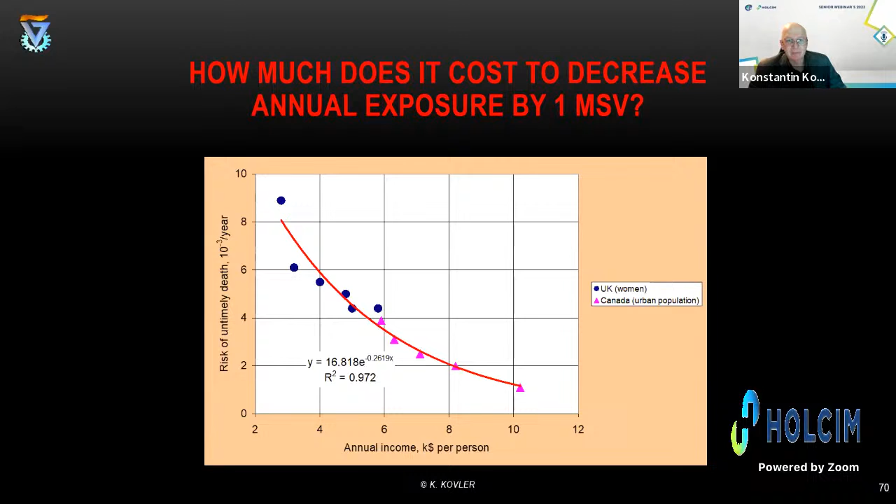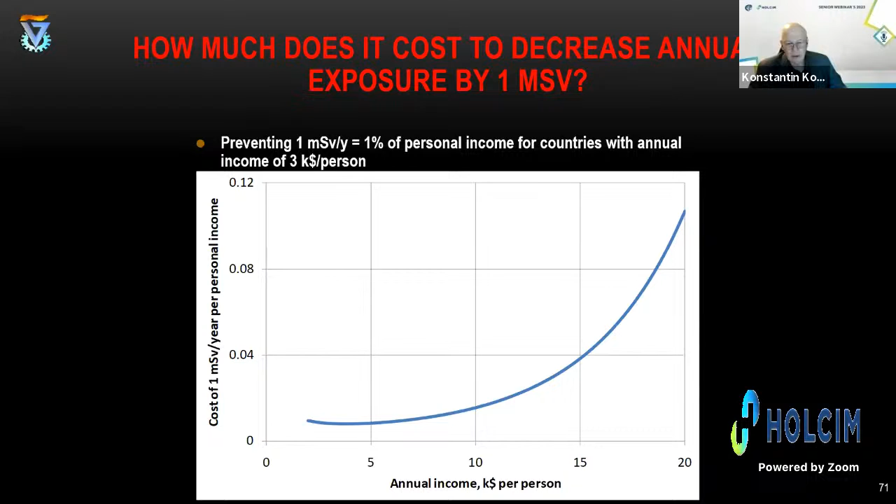Now the income is much higher, but the paper was published many years ago, so it was not updated. And then you can compare the income in different countries in dollars per person. And then as a result, we can calculate how much it would be to prevent exposure to 1 millisievert. This is a dose in Israel, because it is equivalent to an increase of personal income by 2%. So it's milliards or billions of dollars.

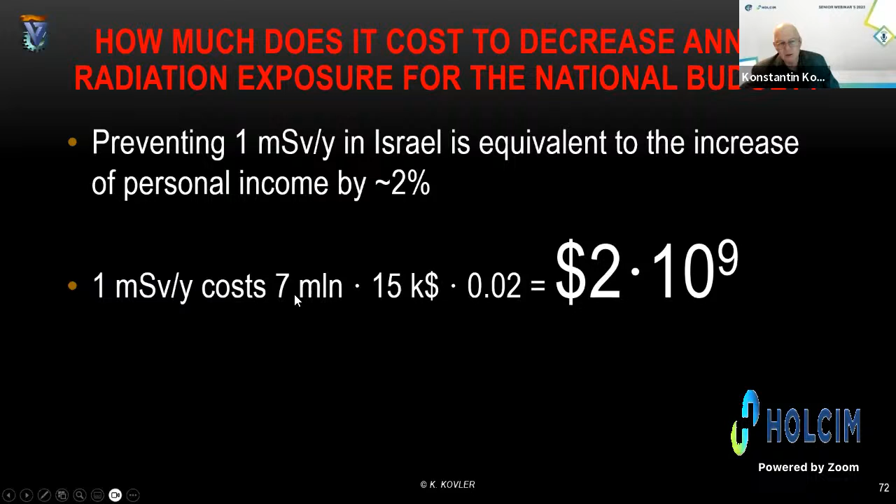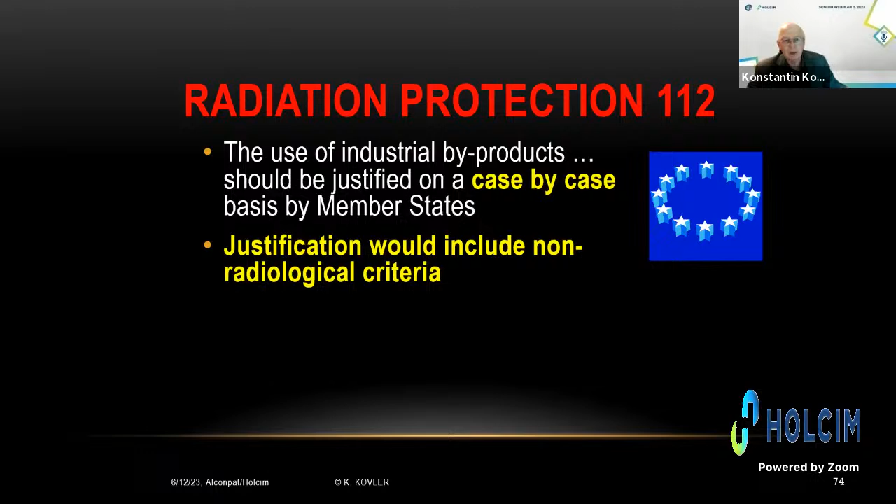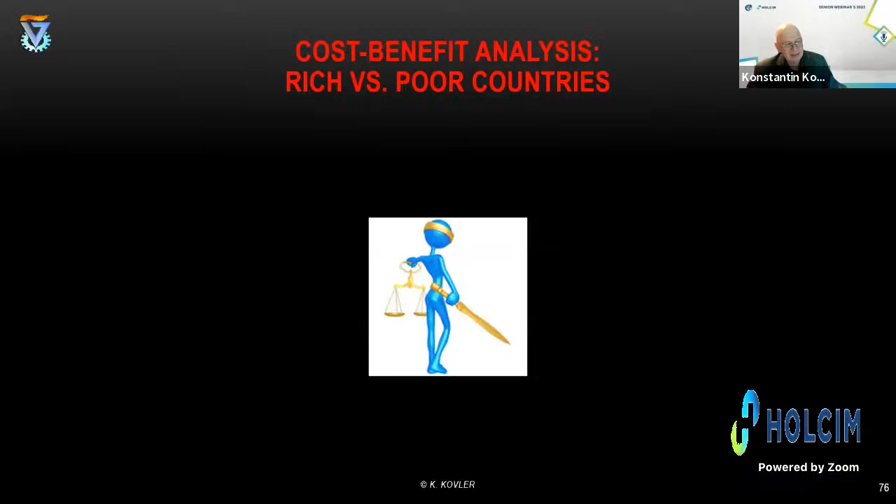So it's an incredible amount. For some other countries, I'd like to skip it because we are closing to the end of my presentation. And then the question is how to make this cost-benefit analysis. The results will be different for rich and poor countries. So we understand perfectly that rich countries pay more; poor countries, communities, individuals express less willingness to pay to avoid environmental harms because they have fewer resources.

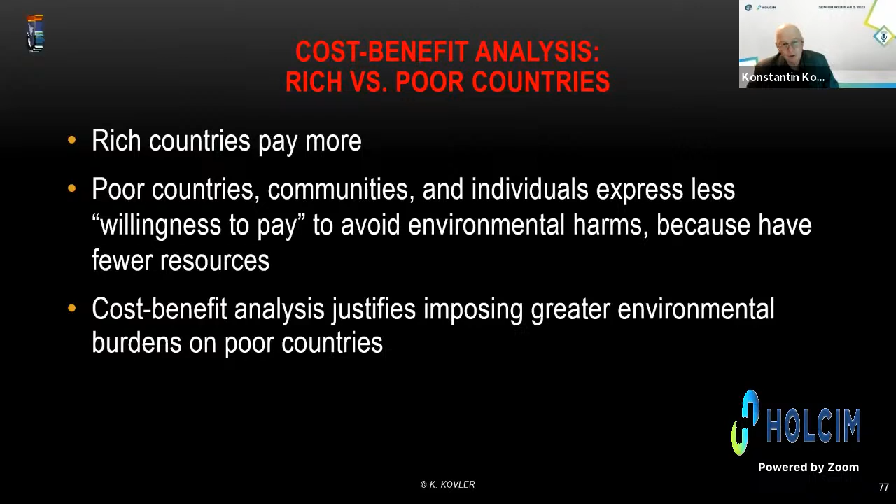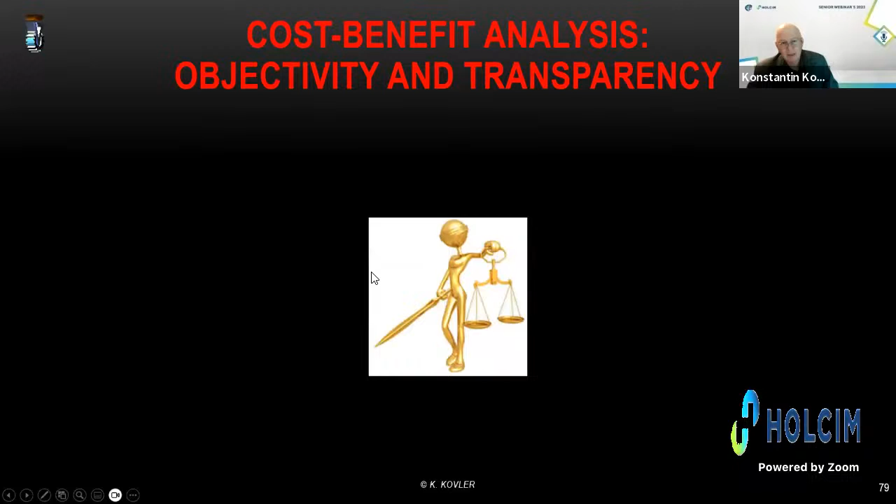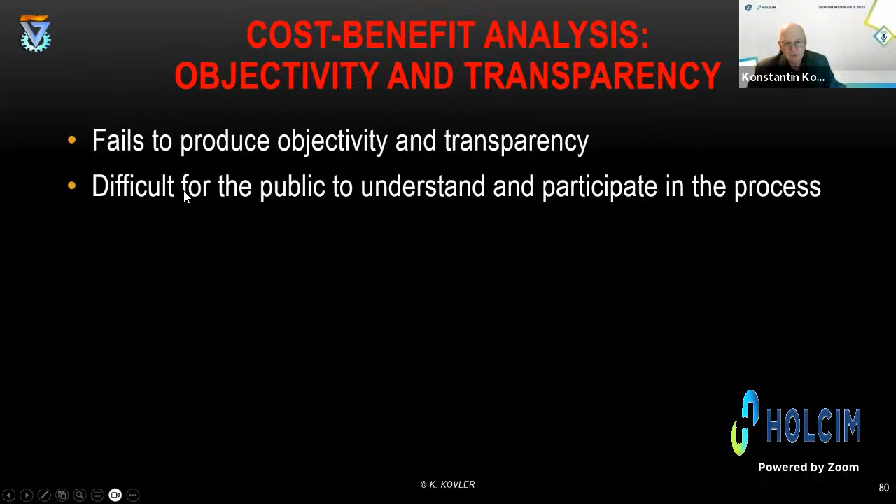And then cost-benefit analysis justifies imposing greater environmental burdens on poor countries. Very unfortunately, but this is a fact. We need to think about it. And of course, we need to compare countries with similar conditions, with a similar GNP per capita ratio. And it's very important to take into account objectivity and transparency for this cost-benefit analysis. If we fail to produce objectivity and transparency, we fail to convince the people. It's very difficult for the public to understand and participate.

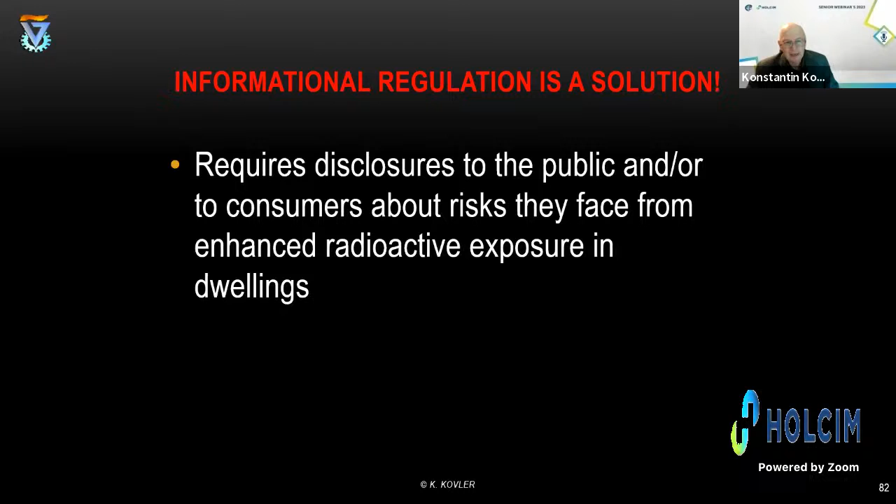So a very important issue is about information, informational regulation. In my opinion, this is a solution. It requires disclosures to the public because in many countries, the public is very afraid. They're scared about listening about radiation. But radiation is surrounding us. This is a part of nature. We understand well that every building material contains a certain amount of contaminants, both chemical and radioactive. So we need to take into account the calculation, cost-benefit analysis, and we need to calculate the risks.

And then we are speaking about a right to know. A right to know regime allows citizens and consumers not only to know about the risks they face, but also empowers them to do something about those risks. Radon mitigation is one of the instruments: introducing special additives into the concrete mix to reduce radon emanation. We have some papers published which demonstrate the usefulness of introducing silica fume and some other additives, reducing radon emanation.

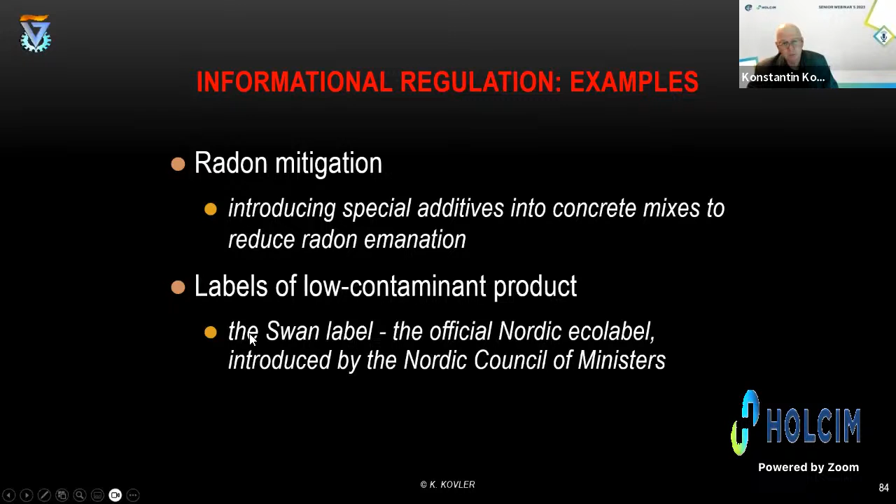Producer, yes, we need to speak about the benefit for the producer, because they produce products and they want to make money. And the consumer, who are the consumers? We are the consumers, all of us. And of course the government, first of all environmental authorities and the Ministry of Economics. All of these bodies are very important. They can restrict, they can manipulate taxes, they can regulate the industry, import and export. They are very important, and we need to find a common language with all of them.

For example, environment is very simple. You cannot come to the shop and ask, please sell me 1 cubic meter of fresh air, because fresh air belongs to all the population, to all of us. You cannot ask, please sell us pure water or pure minerals, because the mineral deposits belong to all of the country. And the governmental authority is responsible for this. So this is just a question.